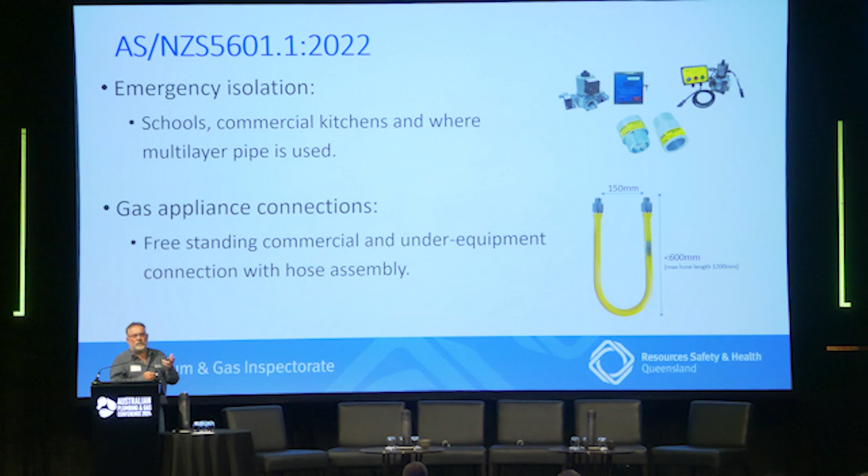The other big change is actually a defined way by which commercial or domestic catering equipment that is connected via a hose assembly should be connected, with very prescriptive ways about the way the hose should hang, the distance of connections and things like that. First of all, I'll just cover off on the schools and commercial kitchens, because since the introduction, as I say, it was 30th of March last year, 2023, when we stopped using the 2013 standard.

I've received quite a number of inquiries, or I've had quite a number of conversations, about how these particular things apply. So for educational institutions, basically for Queensland, we're quite lucky. This came as a bit of a shock to the rest of Australia, but in Queensland, we actually had this built into our Education Queensland building requirements for training centres, for schools, etc.

And basically it talks about having a safety shut-off system that has a really accessible ESD, and it has a pressure proving system, so that where there's no flame failure, like Bunsen burners, those pesky little kids can't turn the taps on and leave them running with gas escaping into the room.

The other one that was introduced is a bit new for us, but it's commercial kitchens, and we have had a significant number of incidents in commercial kitchens where hoses have split or gas appliances have been left on, because commercial kitchens don't require flame supervision on all burners. The main thing to remember is the key reset. This seems to be the point that confuses some people.

So the key reset is all about if the power fails. So if you imagine the power fails in a building, obviously if it's on a solenoid valve, the solenoid valve will shut. What you don't want is when the power comes back on, that solenoid to open with nobody knowing that it's going to open. So that's the point of the key reset: it's a manual intervention by the chef or a member of staff that actually switches a key to re-energise the valve.

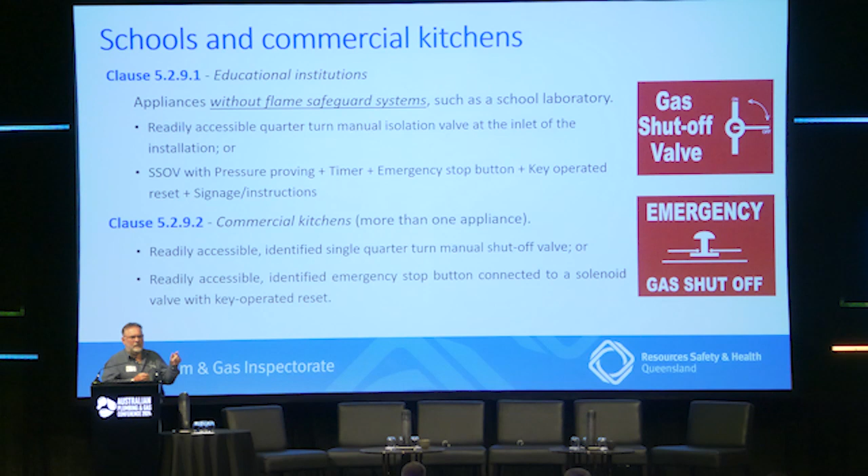Probably the most controversial change, and the one that's caused most consternation with installers, has been some changes around multi-layer pipe. Now the first part of that is that we now require an emergency safety shut-off system where multi-layer pipe is used as part of the installation. And it can be of two types, but only in certain circumstances.

So the preferred option and the mandatory option in, let's say, all buildings, is that it is a safety shut-off system that includes a solenoid valve and some form of sensing through smoke detection or fire safety system, so that should someone be warned within the building that there is a fire or there is a reason to evacuate, the gas is shut off. All right? So that's for any high-rise, commercial kitchens, blocks of units, any of those buildings.

There is an option, and it is supposed to be an option, not the way it's supposed to be done in a Class 1 building, but there is an option, if it's a Class 1A building, that you can use what they call an excess flow valve. And basically an excess flow valve is exactly what it says. If the flow goes over a certain rate, it automatically shuts off, and so that stops the gas flowing.

So there are some critical points with this. The safety shut-off system with the solenoid valve and the detector, that's quite well known. It's an understood practice. The excess flow valves are a new thing for us in Australia. They have been around for 20 to 25 years in Europe, but they are new for us. They are confusing to size when you first start doing it. We have identified as inspectors, when we go around, that there is quite a high level of lack of understanding of how to size these excess flow valves.

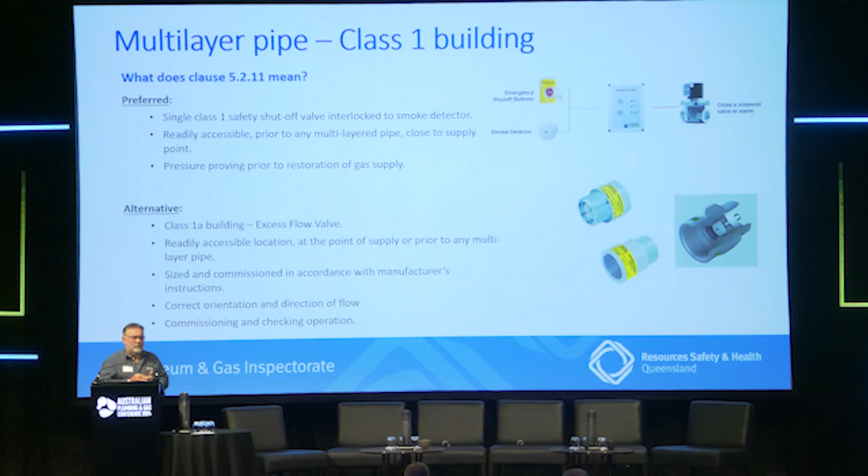The other thing that was introduced was a number of restrictions on multi-layer pipe. Now, this has been introduced because it has been seen that when multi-layer pipe was first introduced into Australia, there were a number of things within the European standard, where it came from, that weren't included in its first introduction. So, for instance, building practices are different in Europe, but they're basically brick homes, twin brick wall homes, and originally multi-layer pipe wasn't allowed to be exposed. It had to be within the fabric of the building, not exposed to UV or exposed to mechanical damage.

So now in our standard, in 5601, we now have some requirements that it's not permitted external to the building. That doesn't just mean outside of the building, exposed in the garden or the sunlight. It means exposed from the building fabric. So when you enter a wall, if you come off LPG cylinders or the gas meter, you need a metre of copper pipe before you go to PEX inside the wall. And before you exit the wall to go to an appliance, you need another metre of copper pipe. So all of the PEX pipe should be contained within the building fabric itself.

Part of that is UV protection, mechanical strength of the pipe, and that metre of copper is also about heat transfer if someone tries to braze onto the end of the pipe, not knowing what is within the wall.

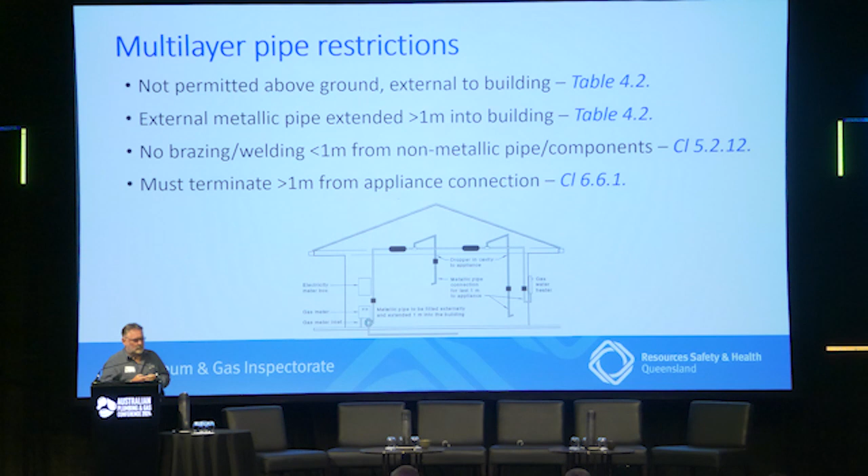5601 Part 2. So we had Part 2 introduced in 2020, 2 years earlier. I'm not going to go through Part 2 in detail today, but some of the questions that I get are around ignition sources, and how do they get defined? Obviously, when you're talking about Part 2, we're relating to caravans and boats, and space for the installation is a lot more confined than it is in a domestic home or in a commercial kitchen. And so being able to locate cylinders and pipework away from sources of ignition, especially batteries or generators mounted on drawbars and things, becomes more difficult because of the lack of space.

There's also an element that the caravan itself may have some safety equipment like breakaway systems or anti-lock brakes, which need to be on the drawbar, but because they need to be there, they're within the hazardous zone. So 5601 Part 2 is the only standard you need if it is a domestic caravan. You don't need to go to 1596, and it defines an ignition source differently to some of the other gas standards. It talks about things that are non-sparking by nature or encapsulated, but not necessarily EX rated.

So if you're working in a commercial kitchen or a hydrogen facility, you'd be looking at EX rated equipment, potentially. But with a caravan, there's a cost attached to EX rating, so they just use the terms encapsulated and non-sparking by nature. That allows for that emergency equipment, as I say, the breakaways and electronic braking systems, to be within that zone. And obviously there's risk mitigation because those components aren't used normally when the gas system is being used.

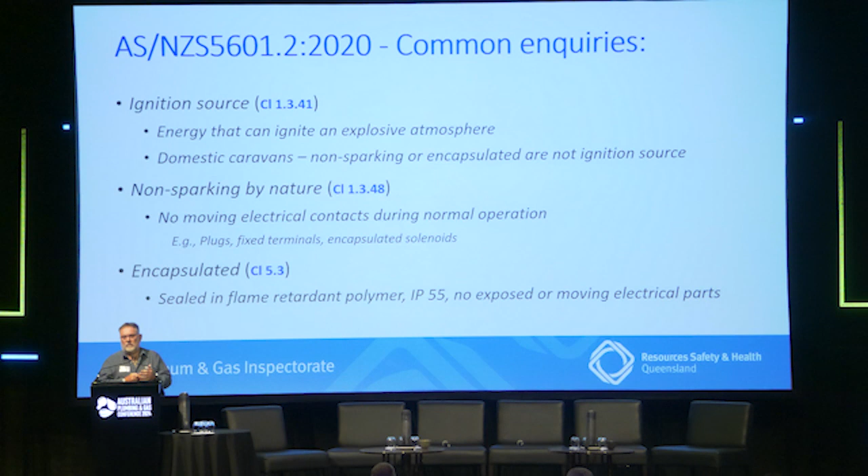The other two questions I get quite a lot: it's not so much a question with the main run, but we do get a lot of people running the main run within the caravan, or especially with motorhomes. But the requirement is that the main run must be outside the vehicle. The reason for that is if any potential leak points are inside the vehicle, then the gas can accumulate. And obviously, if it's under a bed or in lining or something like that, it can collect to a dangerous level. So it has to be outside the caravan or outside the structure, and the pipework from the main run to an appliance needs to be as short as practicable.

The other thing is, I get a lot of questions, and this is becoming more of a problem now because of tiny homes, which are in themselves becoming a conversational point. But why can't we use multi-layer piping, or why can't we use a press fit style fitting?

They are prohibited within the standard, but the reason they are prohibited is because press fit fittings and multi-layer pipe aren't subjected to any vibration testing when they're certified. And also, press fit fittings do move, they just move by nature. They're not a rigid connection as is brazing, so they are prohibited. So the reason they're not allowed at the moment is because of that testing; they're not suitable for the application.

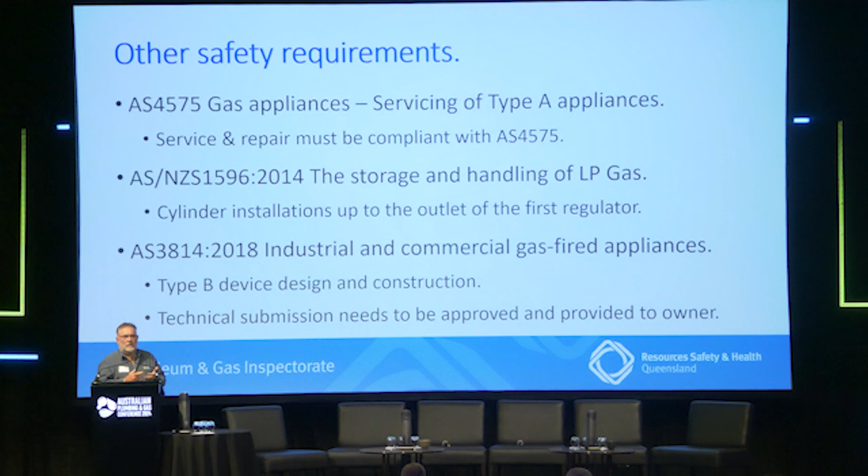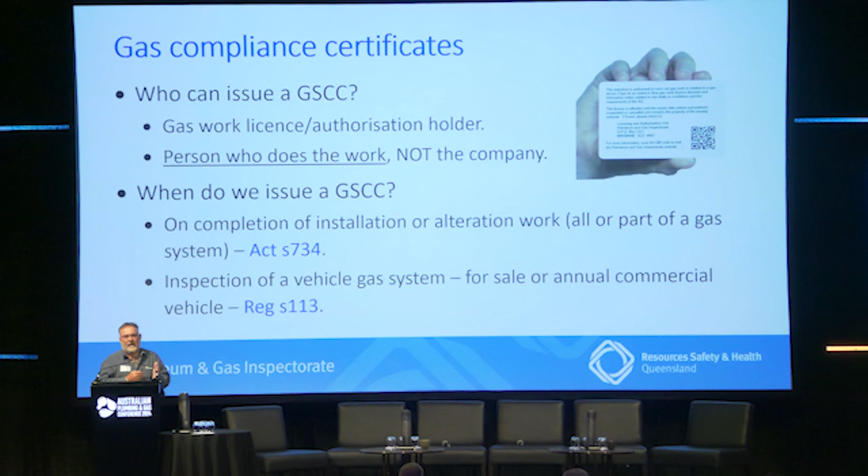Gas compliance certificate. When you've done your work in line with the standards, you have to issue a certificate to say that the work you've done is compliant. We went through this in about 2016, 2017, but it's just started to come up again: who can issue a gas system compliance certificate. If you are a gas work licence holder, it's your obligation to issue a certificate for the work you do. If you work for someone, it's still you that has to issue the certificate, not the company. It is the individual, not the company, that issues the certificate. It's on completion of the installation or alteration, and if you inspect a caravan or a motorhome for resale.

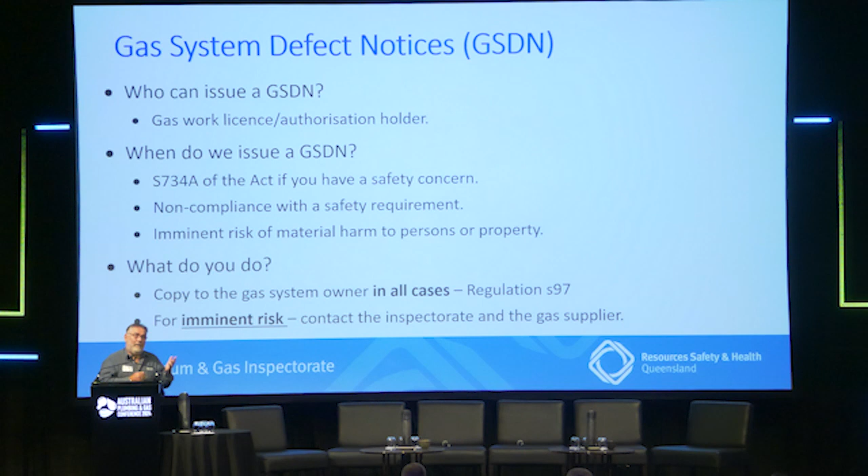On the opposite side to the certificate is the gas system defect notice. A gas system defect notice must be issued if, one, you see a non-compliance, or two, you have a safety concern. The difference between the two is, if it's only non-compliant, that's bad enough, but the copy of the defect notice only has to go to the owner. If there is imminent risk, an actual safety concern like a gas leak or an unflued appliance, no ventilation, soot around an appliance, not only do you need to issue the defect notice, but you also have to contact the inspectorate and the gas supplier and tell us and them what actions you've taken to mitigate the risk.

Transition to eCert. This is a thing that we are taking on. 3 years ago, we introduced an e-certificate. How many people are using the e-certificate?

That's a good average, 4.

Okay. So I have some news for everybody else. We are transitioning away from hard copy books. It is inevitable that we will transition away. Currently, we have a projected timeline. We've begun consultation. We've sent out some surveys. So hopefully, if you're a gas work licence holder, you've received some communication about a survey. You may have also seen those surveys online.

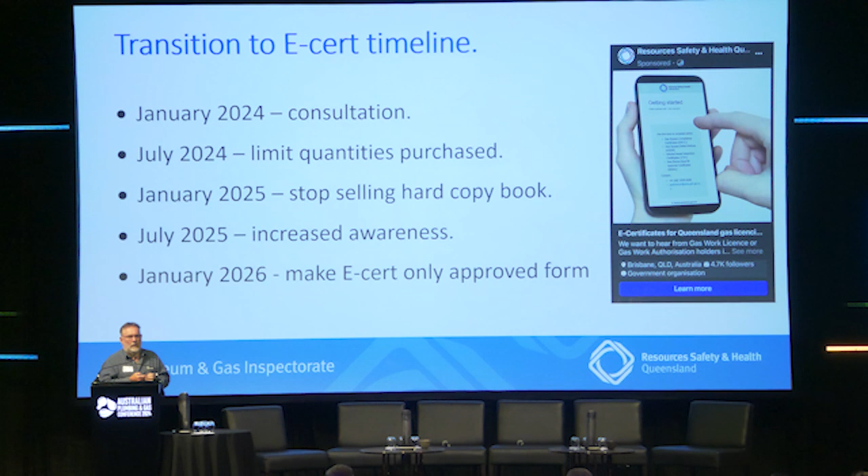In July this year, we will start to limit the quantities of books that can be purchased by individuals. That's a risk mitigation thing to stop you ending up with 20 books that you then can't use, because there will be a point in time where they're no longer a legal document. And then by 2026, we're going to actually stop hard copy certificates being a legal document.

The reason we're moving to an eCert is twofold. One, our initial research into this found that consumers, gas system owners, are more likely to keep an e-certificate because it's just a PDF attached to an email than they are a paper document. It's not me, but modern generation, apparently they can find e-stuff better than they can find hard stuff.

It also gives us some feedback about where work is being done and what work is being done. And it means that as a risk-based regulator, because we're limited in numbers, we can focus our efforts where we need to focus them. So not only can we see certificates, but we can also see defect notices.

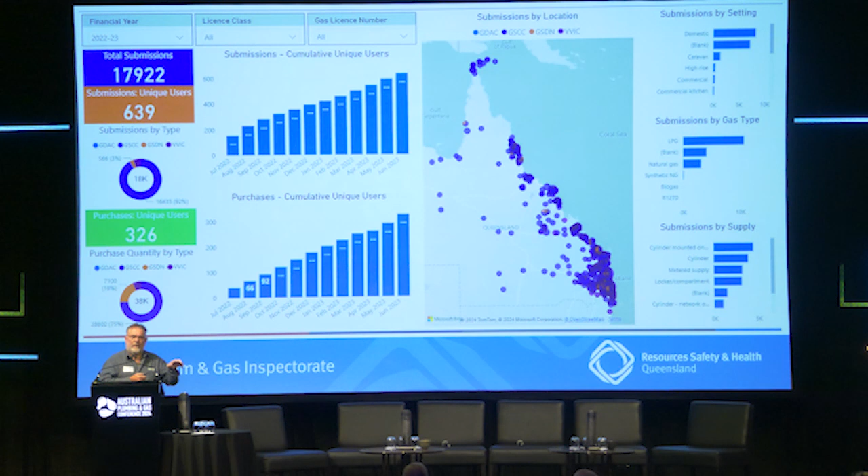There are also potentials for the future that information may be available online to gas system owners. So if they have lost it for some reason and they want to change supplier, they may be able to go in and get a copy, maybe not a copy of the certificate itself, but the information from the certificate. That's all about licence work.

We have another issue as an inspector, as a regulator. We have this other stuff that happens that we don't have any line of sight towards. So over the past 5 years, we've had 5 commercial kitchens that have resulted in significant injuries to people, staff, young people working in restaurants and kitchens after work, where the work has been conducted by an unlicensed person. Now, yes, we pursue that as an offence, and yes, we prosecute that, and yes, people get fines. That doesn't stop people getting hurt.

So we've indulged, I guess you'd say, a fairly significant financial investment into a gas safety awareness campaign. So you should start to see these flyers around the place. We're focusing on smaller commercial kitchens, so not large burger chains or large pizza chains, because they have a maintenance program built into their systems, but people who only own one coffee shop, a family that own a coffee shop, or the little fish and chip shop, places like that.

Interestingly, the research has indicated that no one deliberately tries to break the law. The reason they do it is a necessity to get something done quickly, and when they want it done, not when someone can actually turn up and get it done. But anyway, the point is we've entered into this gas safety awareness campaign. If you see the products around, the flyers, etc., please distribute them to your existing customers, because it may spread the word and you may get more work out of it.

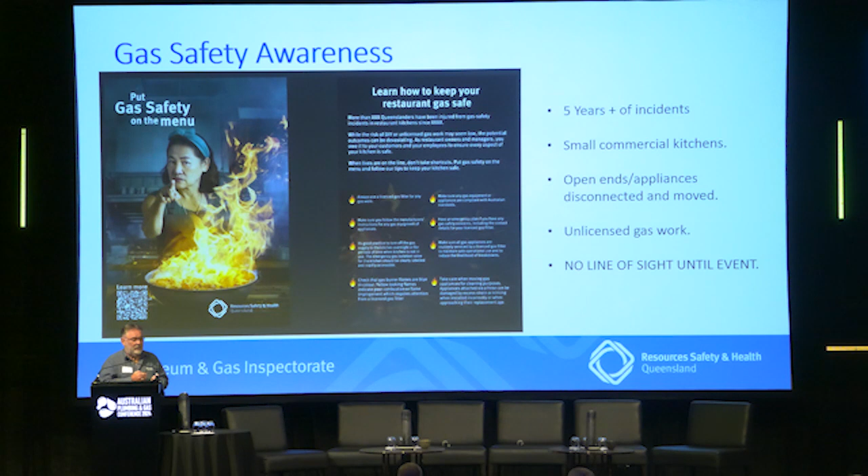You may also see some bus shelter with the LED signs on everything. So we're trying to promote that. To be honest, it won't be so much central Brisbane or Gold Coast CBD, but it is places on the extremities, the smaller places out to the side.

As well as that gas safety awareness campaign, we do issue a number of safety alerts each year in response to incidents or in response to concerns raised. I would encourage you to log on to our website and join our little club that says you want to receive updates on this. Some of the significant incidents in the last year have been the lack of overpressure protection on LPG.

The matter's now closed, but sadly we had a fatality in Townsville, and the causal factor was that the regulator to the house had no OPP on the regulator. So the gas system was overpressurised. We only know it was overpressurised above 150 kPa. We don't know what it went up to. Obviously, it could have gone up to cylinder pressure, but we know it went above 150 kPa.

The owners of the house smelt gas. The husband got up and went to the kitchen. His first reaction was to touch the cooktop knobs to see if it was turned off. Unfortunately, the cooktop had one of the ignition systems where as soon as you touch the knob, it sparks. And it sparked, and the house was damaged, and the gentleman passed away later in hospital. So that is a significant event for us.

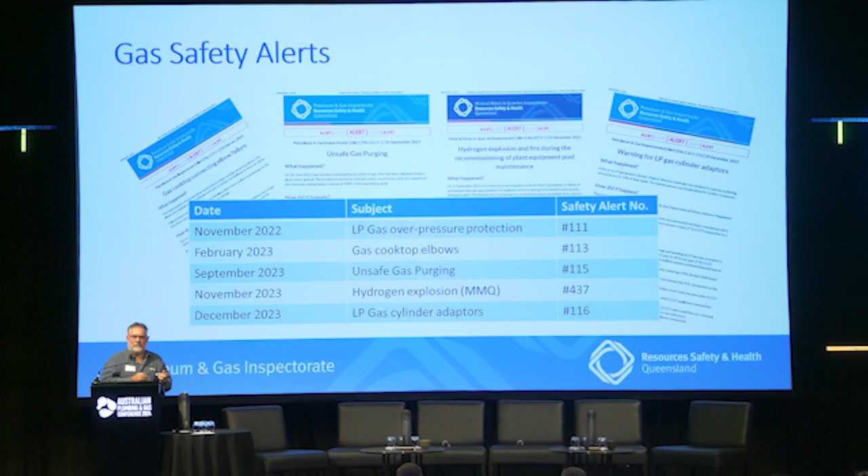Current and future issues, gas work licence renewals. So with the e-certificates, we are also looking at gas work licence renewals and the process of that, because at the moment you just pay your money and you get your next licence. There are other regulators, such as the ESO, where you have to demonstrate some form of currency through an online test or possibly attending a half-day refresher. And we are thinking about that in the future. So once the e-certificate transition is well publicised and understood, we will start another consultation process about that.

But when you think about it logically, there are some of us who got their licence a long, long time ago. Oh, sorry, Bill. I was looking around the room broadly, and maybe we learned under a 1932 standard or a 2002 standard, and we haven't been refreshed on what the new standard says. Especially with moving towards hydrogen, biomethane, there may be some changes in those standards which become quite significant that people need to be aware of if they're going to carry on doing the work. So it's something we're looking at.

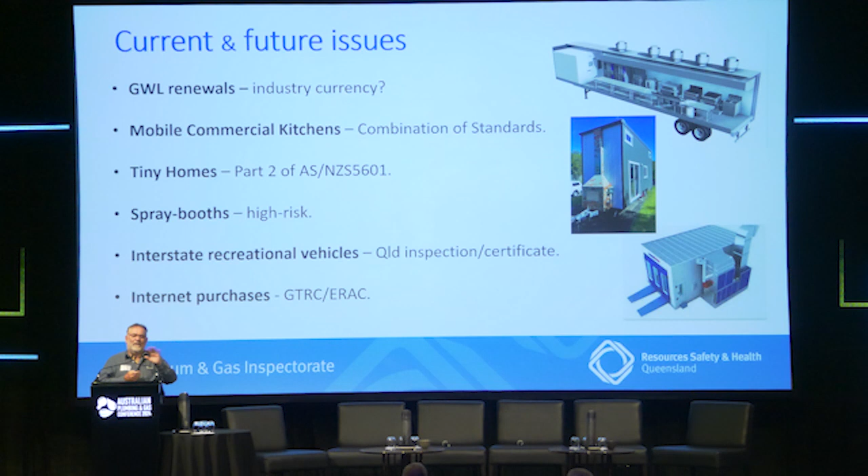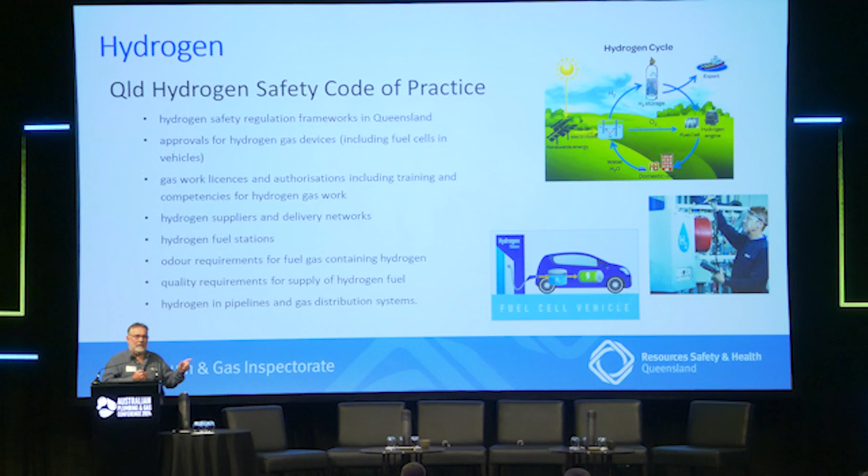Okay, I will cover off now very quickly. I apologise I've taken too long. Queensland led the way by producing a hydrogen safety code of practice. Nationally now they're trying to catch up with us and produce their own national code. It's free and it's available on our website if you're involved in any hydrogen projects or you want to get hydrogen on your authorisation. Have a read of that document. It tells you the criteria to get that.

Moving forward with hydrogen, there is a technical specification for hydrogen appliances. So we are preparing for cooktops, hot water units in people's homes to be 100% hydrogen in the future. There is a technical specification that's coming out to cover that, and qualifications and training for people to move towards a hydrogen future as licensed gas fitters. That is also on the project for this year.

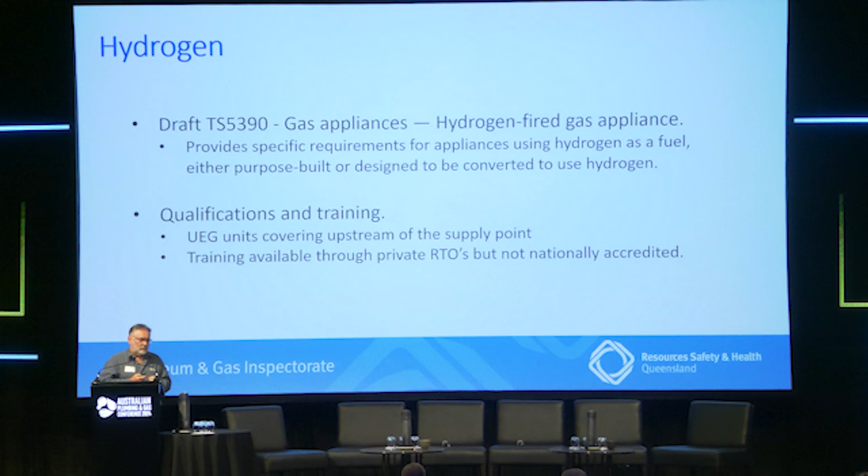Thank you, Paul. You didn't get the double flush. It's okay. Well done. And oh, there isn't a double flush. I just made that up. But I look forward to when you're on stage with Jared very soon. That could be interesting.